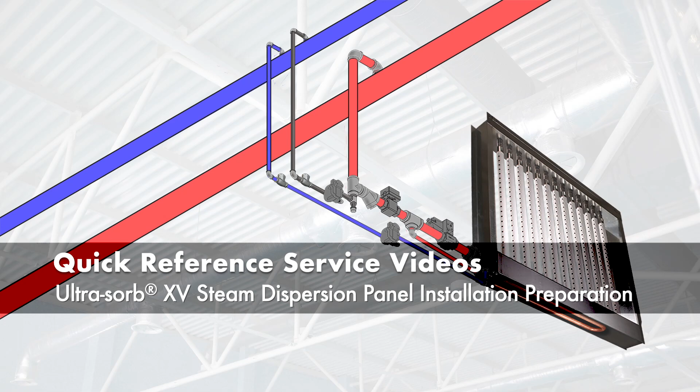In this video, I'm going to walk through everything you need to have on hand and know in advance for a smooth installation of the Ultra-sorb Model XV steam dispersion panel. Let's start with the tools and supplies you will need.

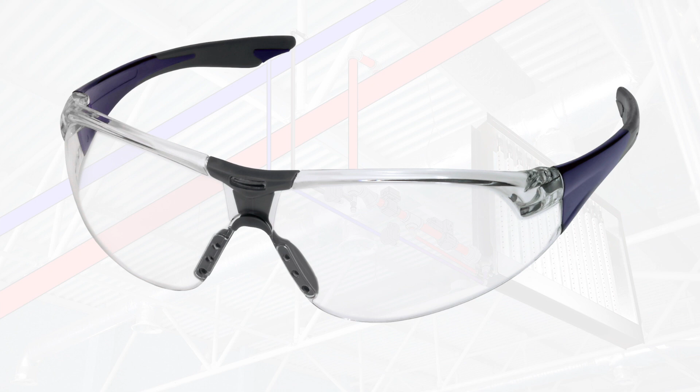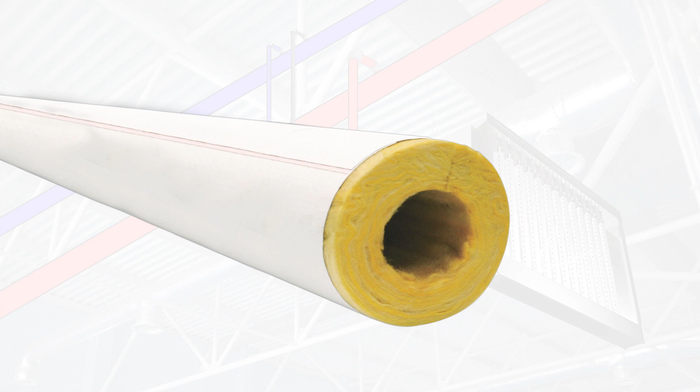Basic hand tools, Teflon tape or pipe dope, or both, PPE, tape measure, cell phone, steam hose, tubing or pipe and fittings, insulation for steam piping or tubing (do not insulate steam hose), waterproof caulking, and of course the Ultra-sorb XV IOM. Now we'll walk through the installation pointers that are good to have up front.

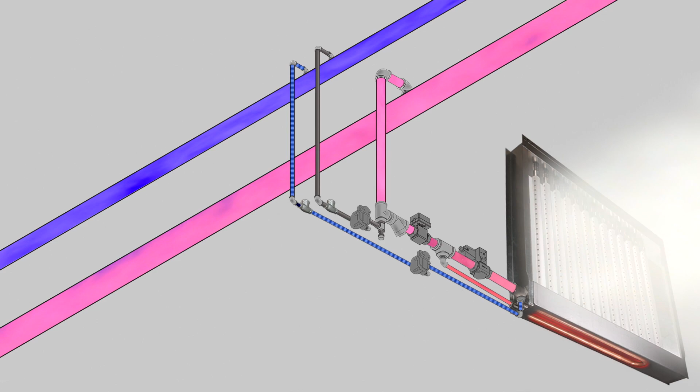You will need to assemble the dispersion panel if it's shipped unassembled. The IOM provides assembly instructions. Make sure you have enough steam hose, tubing, or pipe to cover the distance to the dispersion location. If tubing or pipe, count the number and types of fittings required to make the installation according to the IOM.

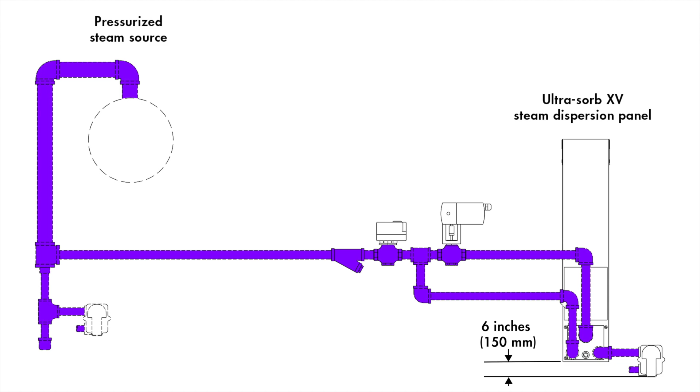Have 6 inches of clearance below the panel for a steam trap downstream from the heat exchanger in the Ultra-sorb XV header. Lift the dispersion panel into the duct cutout or the air handler and fasten it in place through the mounting flanges with a drill driver. Caulk along the seams to minimize air leakage.

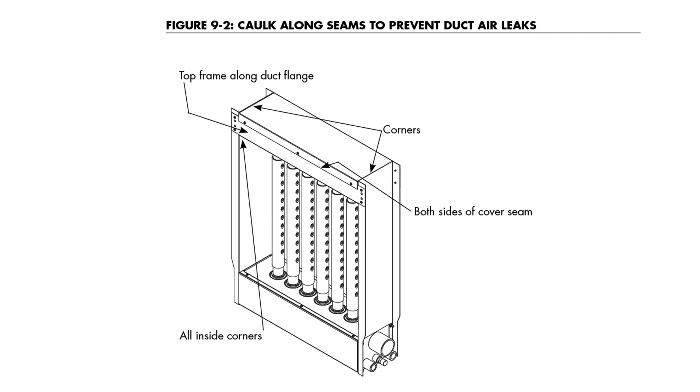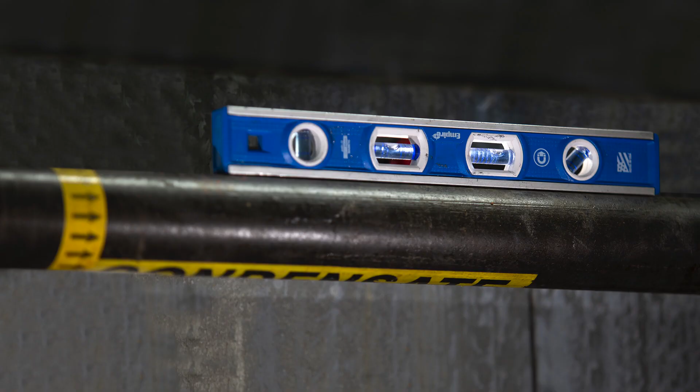Connect the pressurized steam supply piping for the heat exchanger in the Ultra-sorb XV header as well as the humidification steam piping. Connect the condensate return piping. Check for leaks and proper pitch of all piping. Test run the system to make sure it disperses humidification steam and returns condensate to the boiler, and apply insulation to piping or tubing.

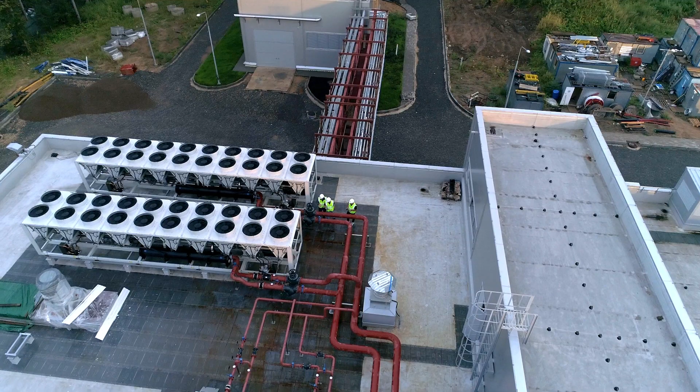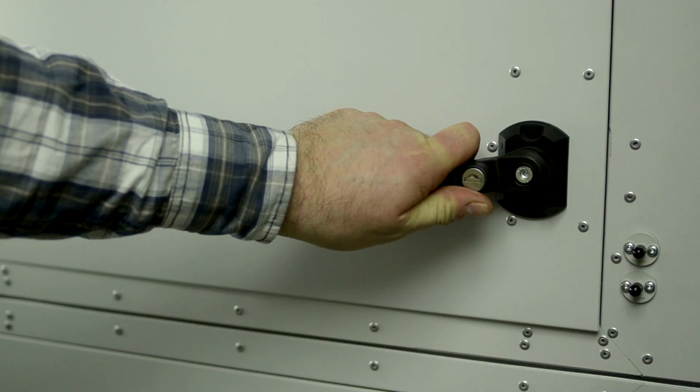Before you head out to the installation site, here are some things you should verify. Installation location for the panel is clear and accessible. Condensate return or drain is available and operational. Air handler or duct can be activated to test the Ultra-sorb XV operation. Contact information for DriSteem sales representative is available, and the type of XV installation the engineer is calling for.

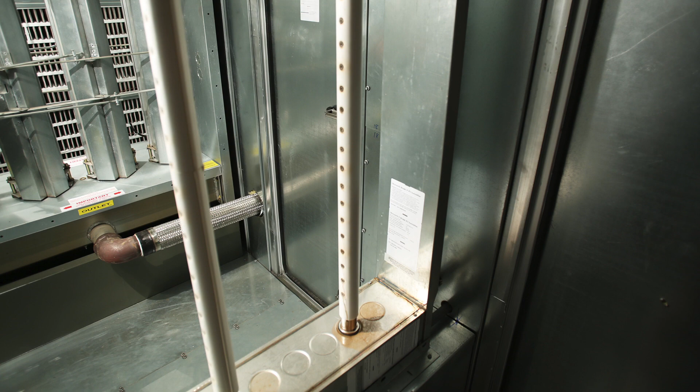Installation of the Ultra-sorb Model XV steam dispersion panel will take about 3 to 8 hours if everything at the worksite is ready to go. Once installed, startup time may vary depending on the application and system size.

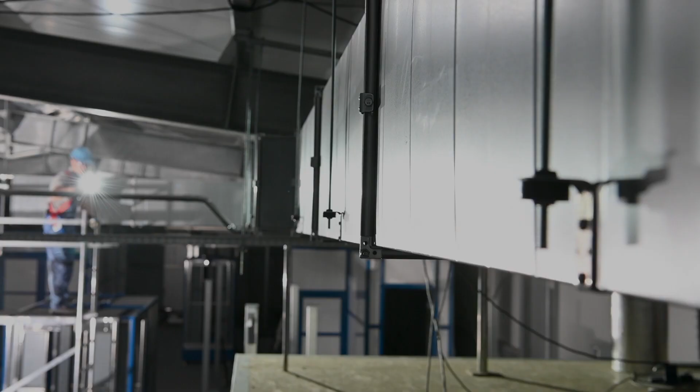Now you have all the information you need to properly prepare for a smooth installation of the Ultra-sorb Model XV steam dispersion panel. Taking time to plan and check ahead of installation day will save time in the field and prevent unnecessary return trips.